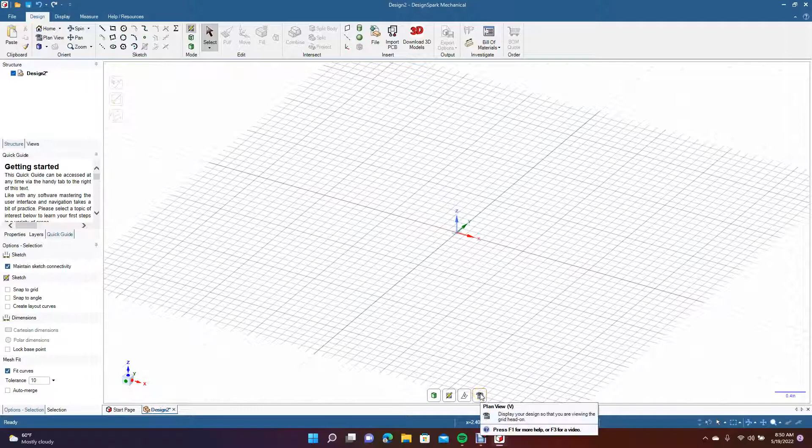Now change this here to Plan View. Now I have a little sketch here that I'm going to use as a reference, so we're going to go ahead and bring that in and rotate it.

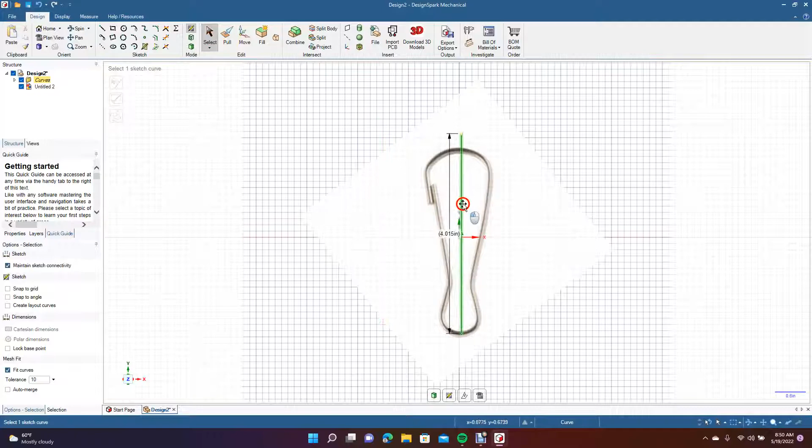Go ahead and full size this. I'm going to make this lanyard maybe like 3 inches, something like that. Or actually, this is probably a good size right here. Yeah, we'll go ahead and make it this size. So go ahead and click delete on that.

So what we're going to do is go ahead and put a line in the middle here. Go ahead and get your line tool. Let's go from this line here straight down, and then select the click off. We're going to right mouse click on that and set as mirror.

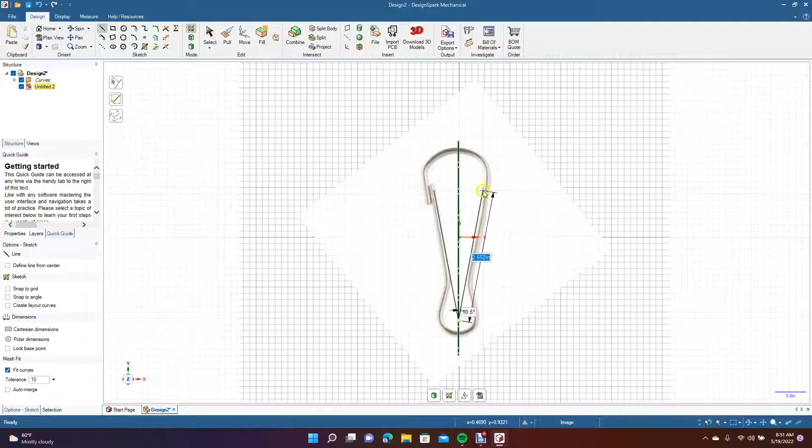And then we're going to start drawing our construction here. Let's move this over a little bit, about to there. First we're going to get the line tool. You could actually start here, but it doesn't matter, we're going to trim this off, so it's probably better to start here. So we'll go ahead and put this first line here.

This is going to be 2.763, and it's going to be at an 11.5 degree angle. So go ahead and enter and select the click off.

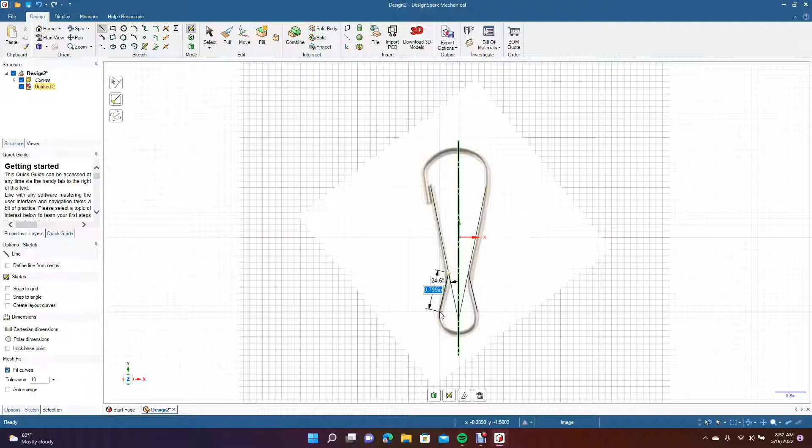Now we're going to go ahead and draw this piece in the bottom here. Go ahead and get your line tool, we'll go ahead and start there. Now we're going to put a line in there, 0.799 inches, at 24.6 degree angle. Go ahead and click enter, and then click on select to take it off.

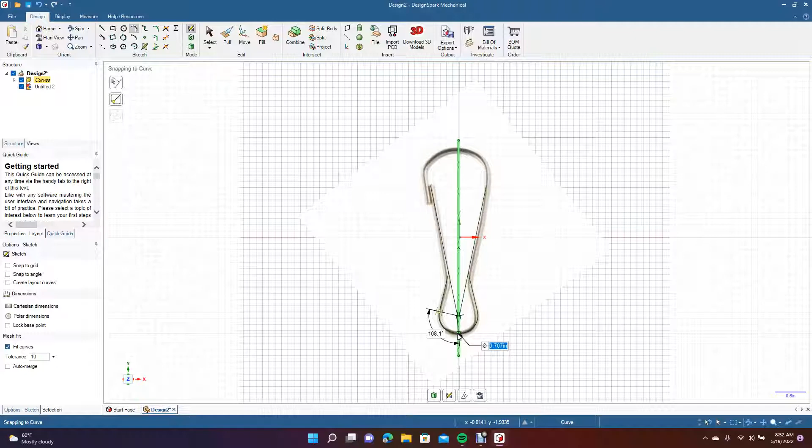Now we're going to get our tangent arc right here, and we're going to click here and drag this over. This is going to be 0.707 inches at 108.1 degrees. We'll click and now we have this part in here.

What we're going to have to do is turn off this mirror line to do this piece here, because this is obviously not the same on the left as it is on the right. So we're going to double right mouse click on the line and take off set as mirror.

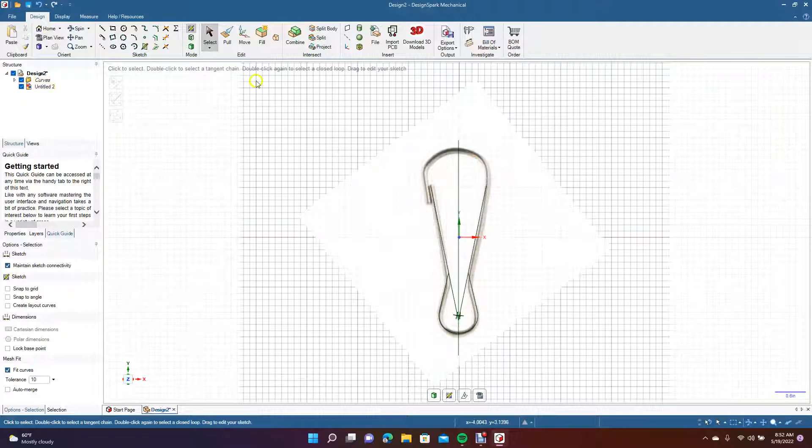We're going to grab our tangent arc, and then we're going to come from somewhere. You don't have to come from here, come from down here a little bit. Actually, undo that. Let's go from the end here, we're going to go ahead and round that over. So it's going to be 1.196 inches at 98 degrees.

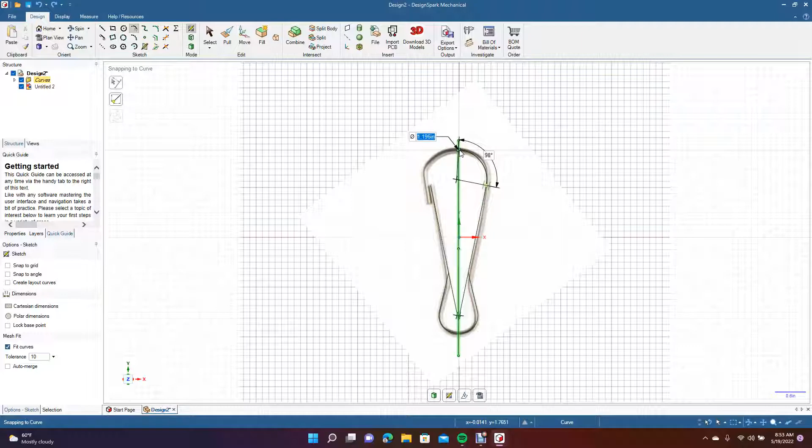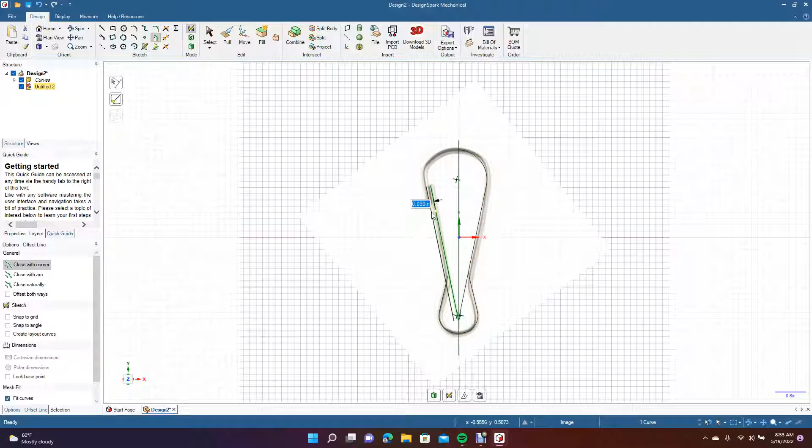Go ahead and click. Now we're going to put this one in here. This one's a little different because we're going to be using this line here as a reference. So we're going to get our offset curve, and we're going to drag this over let's go 0.090.

Okay, now let's continue up with that line. We'll go ahead and click on the line here and just drag straight up, 0.916 at 180 degrees. So it's there.

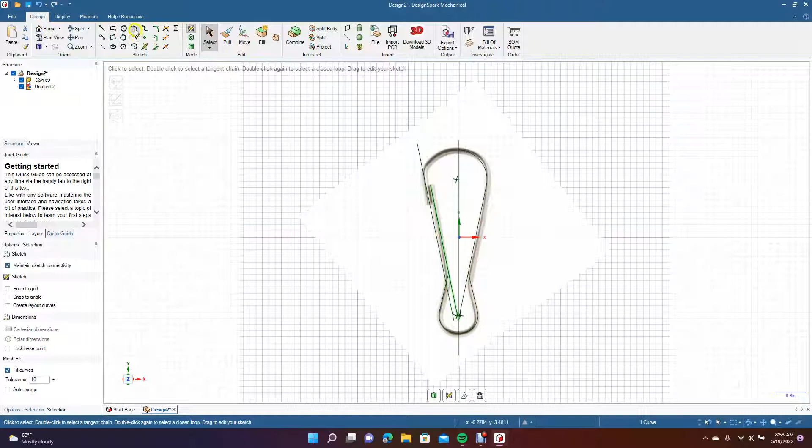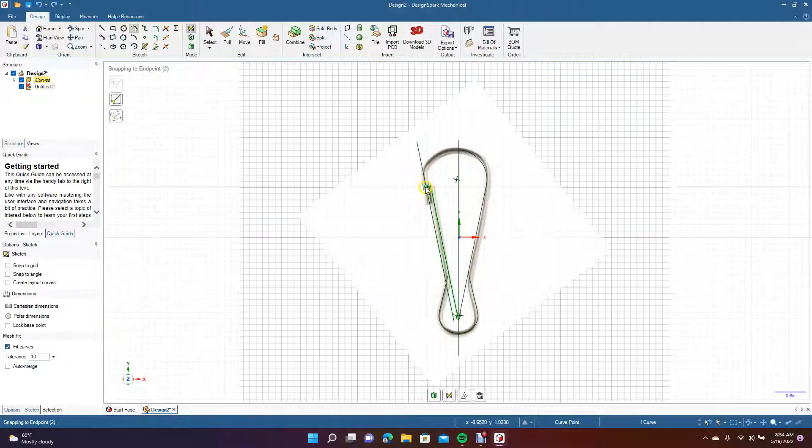Now we're going to get our create tangent arc, and we're going to go from here right about here. Actually, undo that, let's go a little bit farther back, let's go from there. Undo that, a little bit farther down, right about there. Okay, so that's going to be 1.226 inches at a 105 degree angle. Go ahead and select the click off.

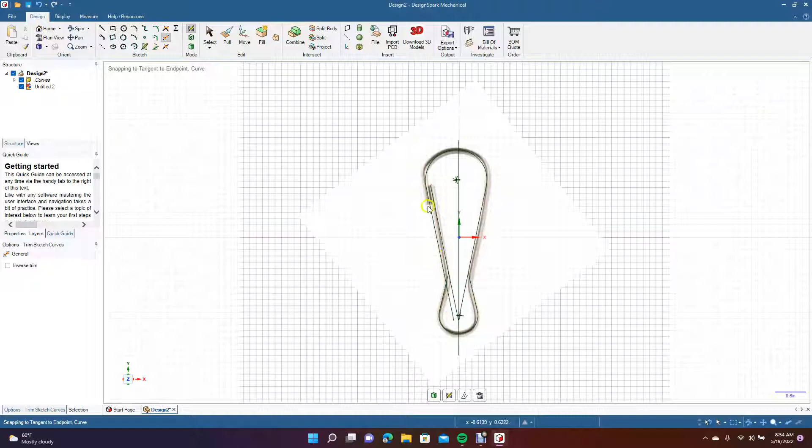Now we're going to go ahead and trim, get our trim away. We're going to trim away this line here, then we're going to trim away. Let's zoom in, Control plus.

We're going to go ahead and add a line in here because we need to trim right here. So just go ahead and click there and then drag it straight across. Let's get our trim away, so we're going to trim away this piece here, trim away this.

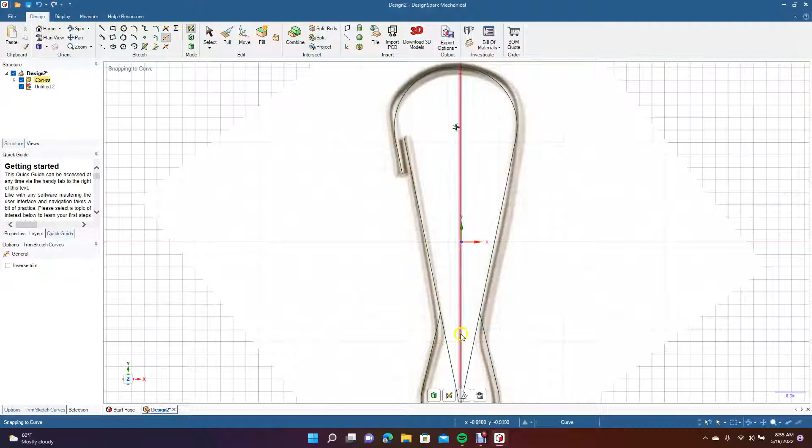Okay, that looks pretty good. Now trim away this piece here, or actually undo this piece here, and then trim away that in the middle. Trim away these on the inside. Now let's trim away that little piece there.

So now you're going to get your create rounded corners, and we're going to go from here over to here. 1.544. Okay, same over here.

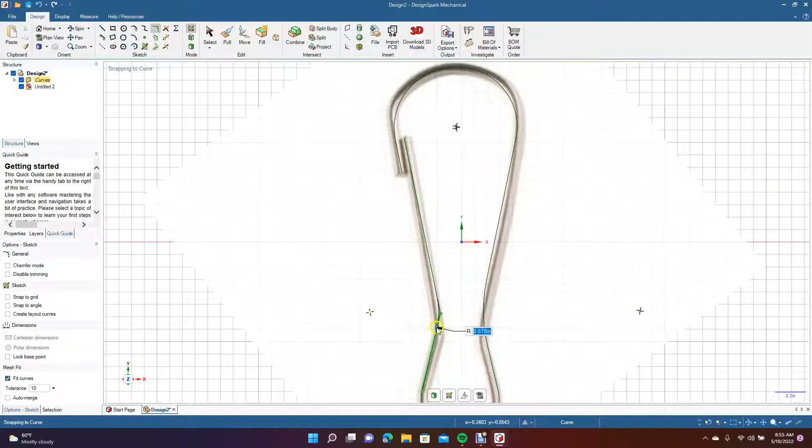Okay. Let's go ahead and control. Let's get rid of this drawing now, or move it out of the way. Let's get rid of this piece. Okay, this is going to be our lanyard hook, so Control plus. So what we need to do now, we'll go ahead and get rid of that.

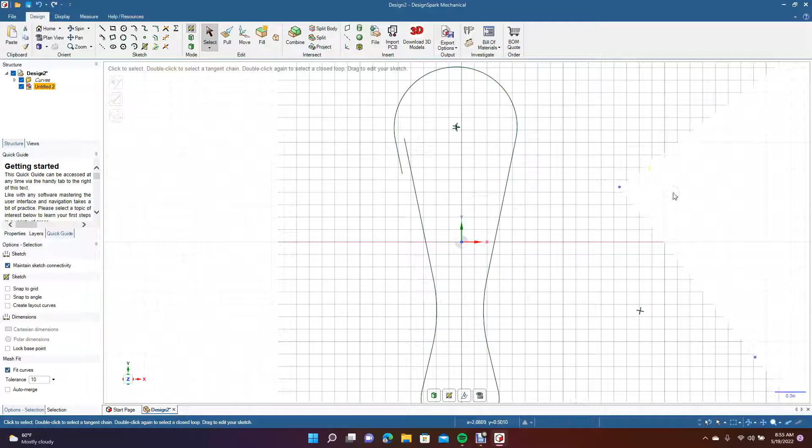Go to your isometric view. Go to your 3D mode. Now we're going to drag this right here. You're just going to drag a little marquee around that so that glows.

Okay, now what we want to do is get our rectangle tool. We're going to go define from center. We're going to turn off the snaps if we have those on. And we're going to click there, and we're going to just drag kind of straight up there.

And we want this to be 0.062. So type in 0.062 and then tab. We want it to be 0.2. Let's go with that. Or actually, let's go 0.15. Okay, 0.15 is good. So now we're going to have to actually, that looks like it's offset a little bit.

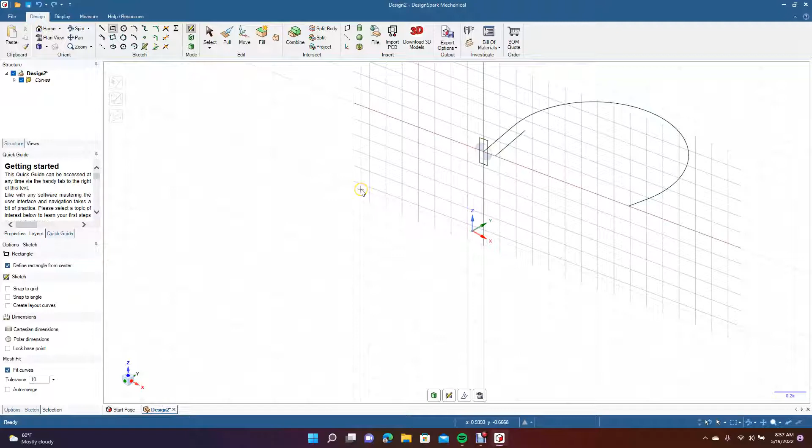So undo that. We're going to keep it this size here. Let's Control plus. Let's go ahead and pan down. We want to offset it a little bit. So let's go get your offset. Let's move this down to 0.032 and then move one up 0.032. This is better here.

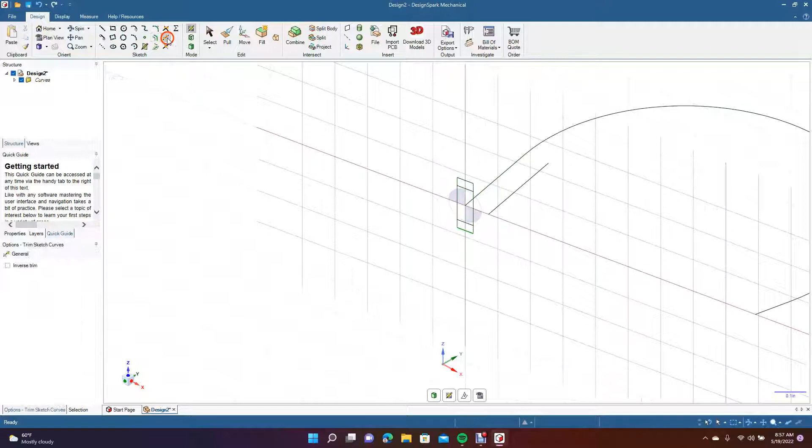So now we're going to get trim away. We'll trim away these little pieces here. Okay, now go back to your 3D mode.

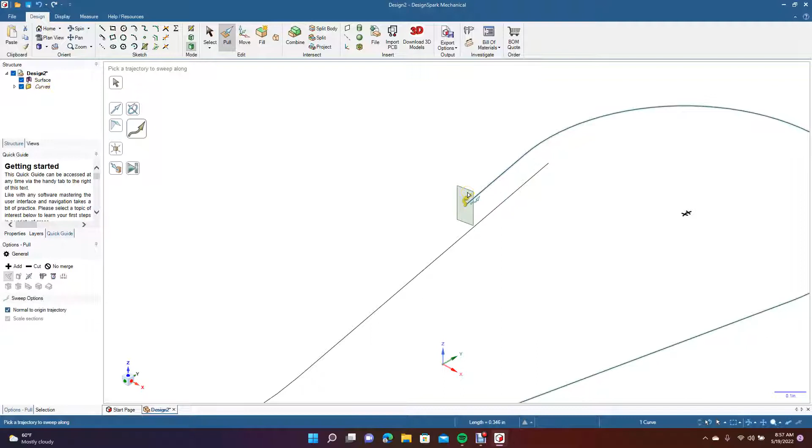Now we're going to go ahead and click on go to pull. We're going to click on this. We're going to go over here to this sweep. And then we're going to click, triple click till everything is selected. Not sure why it's not getting that piece there. Let's hold down the control key. And then we're going to go ahead. Oops, something happened there. Okay, go to pull.

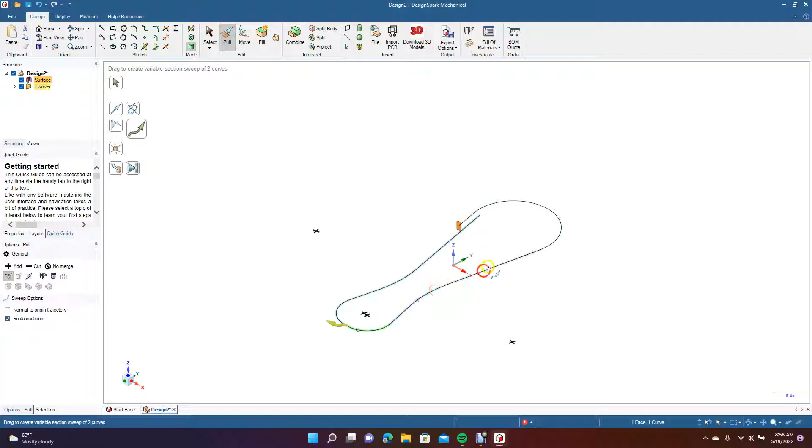Click on that. Go to this one here. For some reason it's not clicking on all of them. So just go ahead and hold down control. Get all of these. And go ahead and go full pull. See, it's variable section. Okay, let's see what's going on here.

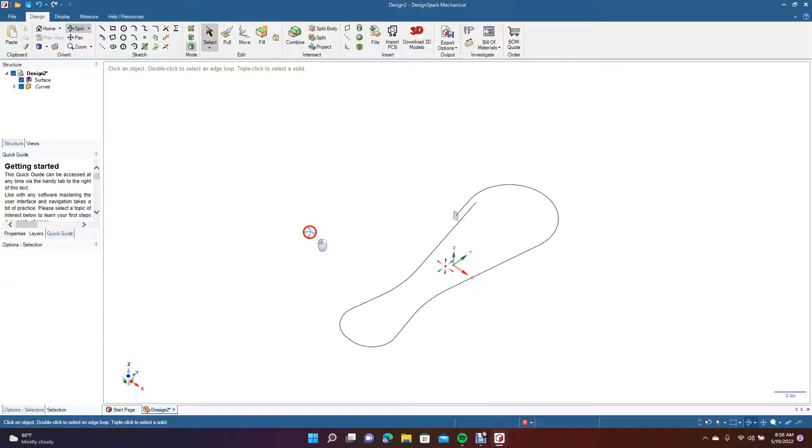Let's spin this. I don't see there being a problem here. But it seems to be a little bit of an issue. All right, let's try this again.

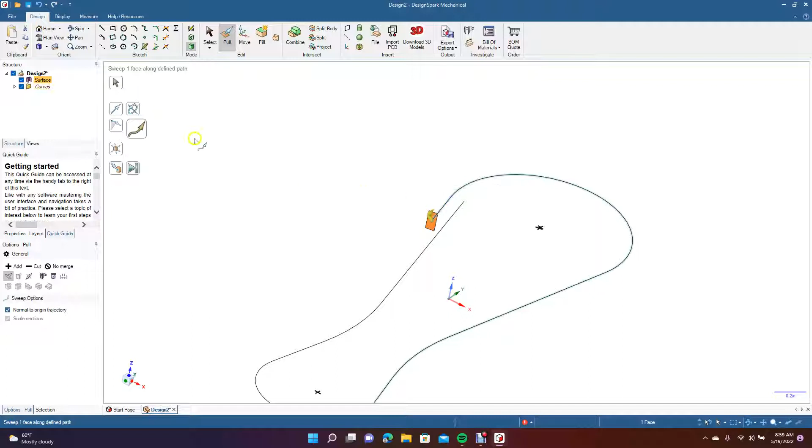Go to pull. Click that. Go to this sweep. Let's go to pull. Let's pull there and see what happens. Okay, that went halfway. And the problem seems to be right here.

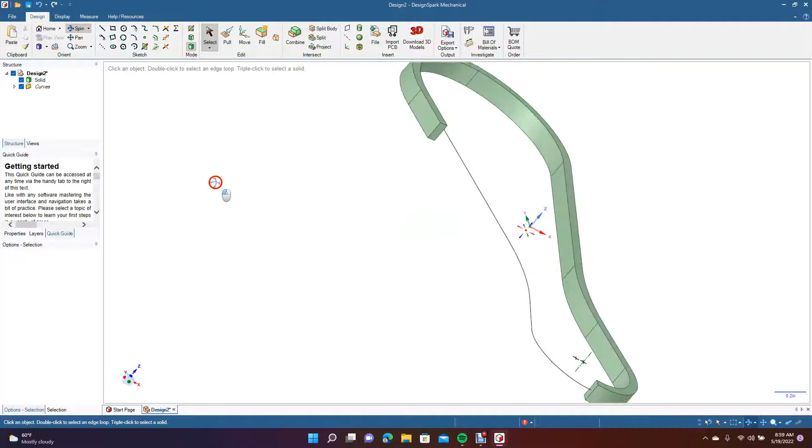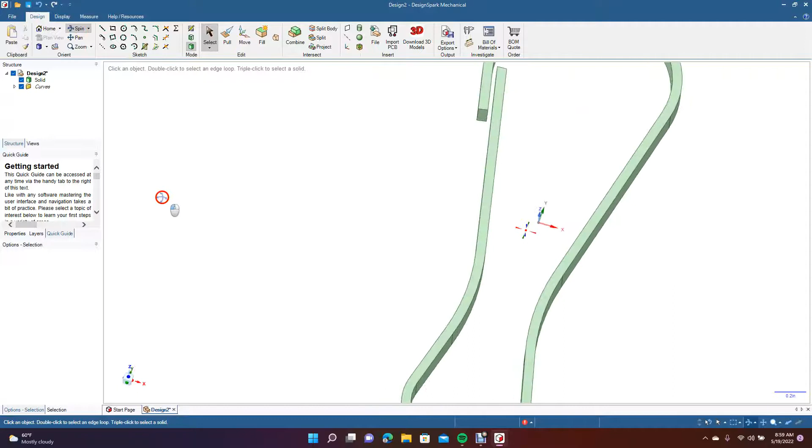Let's see if we can continue that. Let's go ahead and spin. Let's go to pull. Let's pull that. And then go to this one and grab these here. Okay. Not sure why I did that, but that's okay. It should have moved all the way along the thing there.

Control minus. Okay, this is going to be our lanyard hook. One thing I might do is kind of pull this down a little farther. Let's go Control plus. Let's pan down. Go ahead and go to pull. Let's pull this a little farther down, maybe like 0.05.

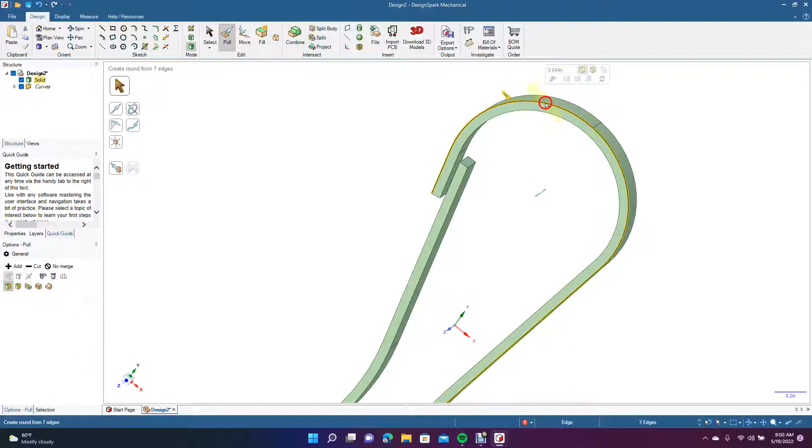Okay, so one more thing I'm going to do is go ahead and then we'll go. Let's get rid of our line there. You don't need it. Okay. Get rid of this one. Now what we're going to do is click Control minus.

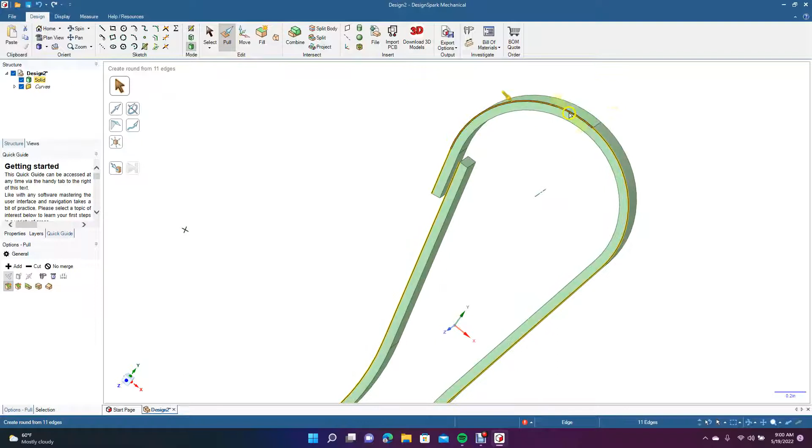Let's go ahead and get these. Okay, now we're going to go pull. Control plus. We're going to put a little fillet in there. We're going to go 0.02.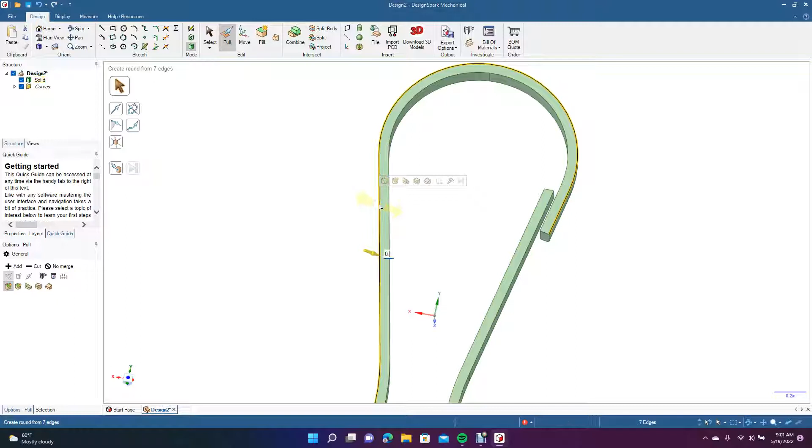Okay, now we're going to do the same on the back side. Spin this around. Pull 0.02. Okay. Spin this. Let's Control minus. Got to get these pieces over here, the bottom.

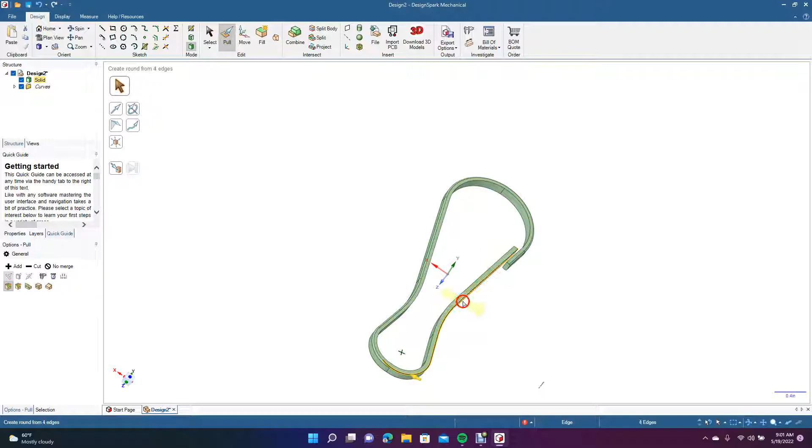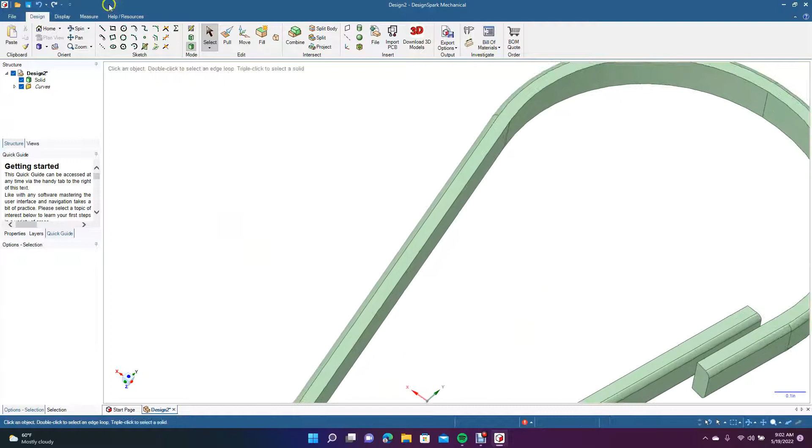Let's get that one. Type in 0.02. Okay. Go ahead and spin this. All right, let's Control plus. I'm going to pan up here. I'm going to put some fillets on here so these corners aren't so sharp.

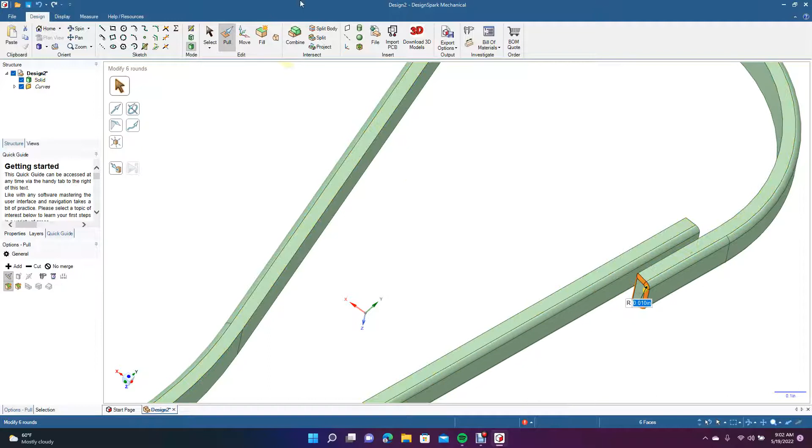So click till everything's selected. Let's type in 0.01. Okay. That's pretty good. Now we'll do the same on this one here. Go to pull. 0.01. Okay.

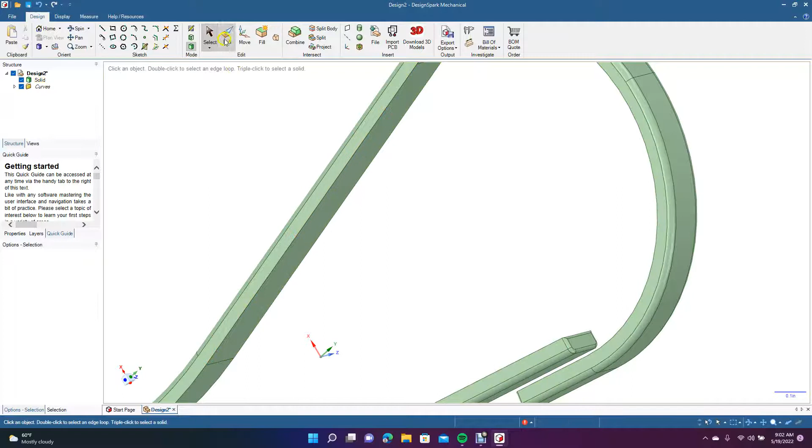Probably going to put one on here too. So let's go ahead and pull 0.02. Let's pan up. Let's get these here. 0.02.

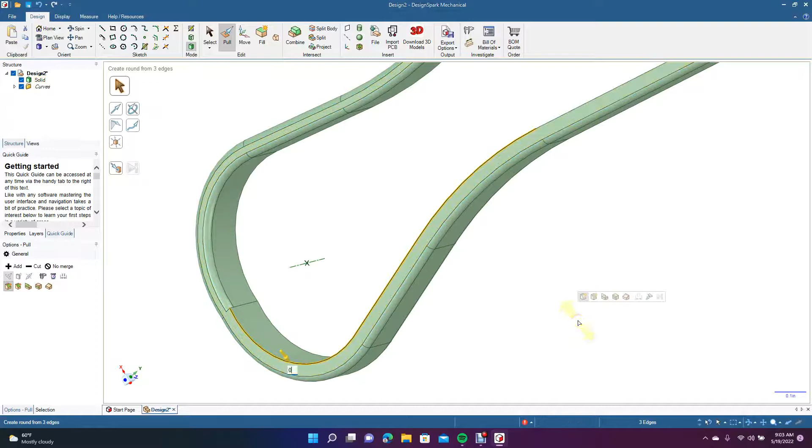It's not pulling that 0.02. Okay, there's that one. 0.02. 0.02. Unable to round. Let's spin this. Why can't I round that? That's the question.

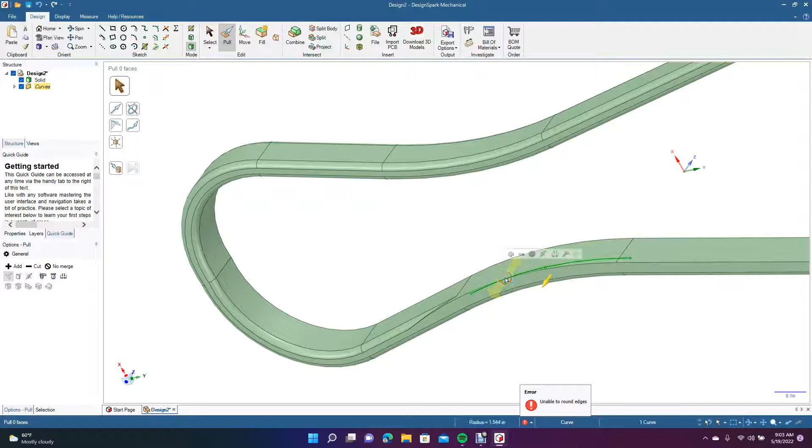0.02. Click off. Let's grab that one. It's not wanting to round that one right there. Maybe it's because that line is there. Nope. All right, let's undo these. Let's do a few undos to get rid of that inner. I'm just going to leave it.

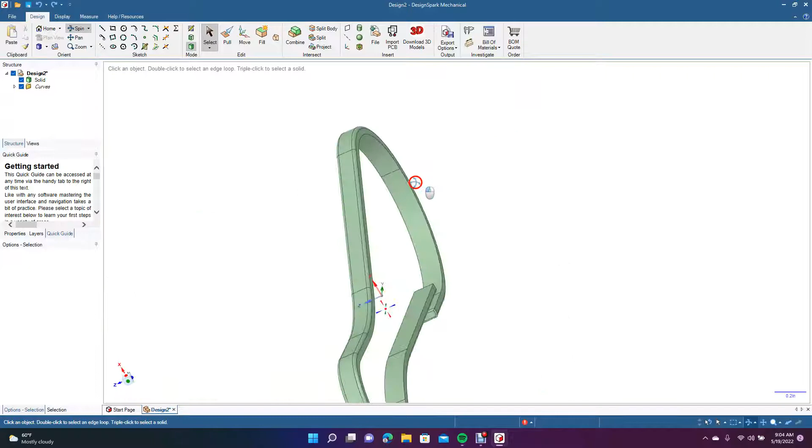So what you got here is a lanyard ring. You got some fillets on the outside. On the inside one, we're going to leave them flat. And then you have some fillets here so they're not sharp. Control minus. Go ahead and go to the top view.

Okay, this is going to be our lanyard clip. It's about 3 inches tall. That's going to end today's tutorial.